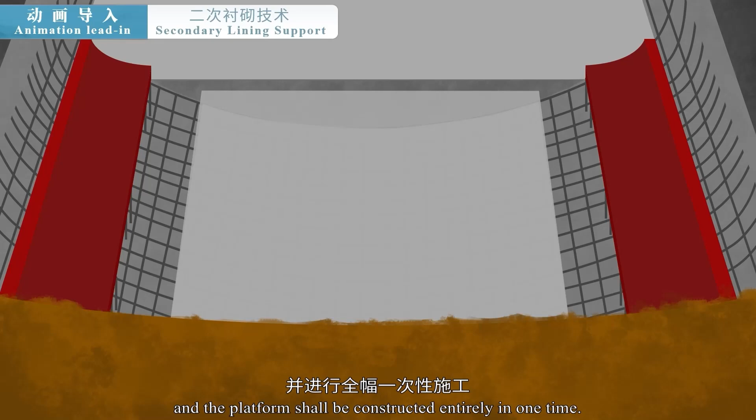The inverted arch filling shall be done by trestle platform to solve the transportation problems inside the tunnel, and the platform shall be constructed entirely in one time. After the completion of the inverted arch, the waterproof boards shall be laid manually with a multifunctional working platform.

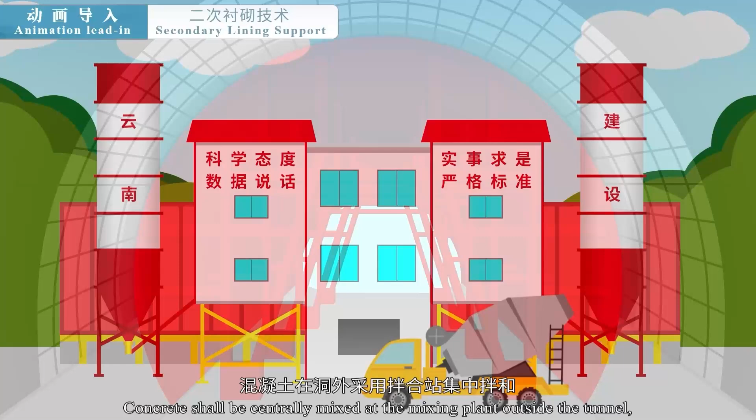After the reinforcement binding, secondary lining shall be carried out by using the hydraulic monolithic lining jumbo. The arch wall shall be poured entirely in one time. Concrete shall be centrally mixed at the mixing plant outside the tunnel, transported into the tunnel by the concrete mixer truck, and pumped into the formwork.

Through animation, we know that secondary lining is an engineering measure to ensure the stability and durability of the tunnel in its service life and to serve as a safety reserve and the last line of defense for tunnel construction. Currently, composite lining is usually adopted for tunnel support, which consists of primary support and secondary lining.

The primary support helps the surrounding rocks to achieve preliminary stability during construction. The secondary lining is to serve as a safety reserve or bear the pressure of surrounding rocks in the later stages. Now, we will explain the construction process and rules of secondary lining.

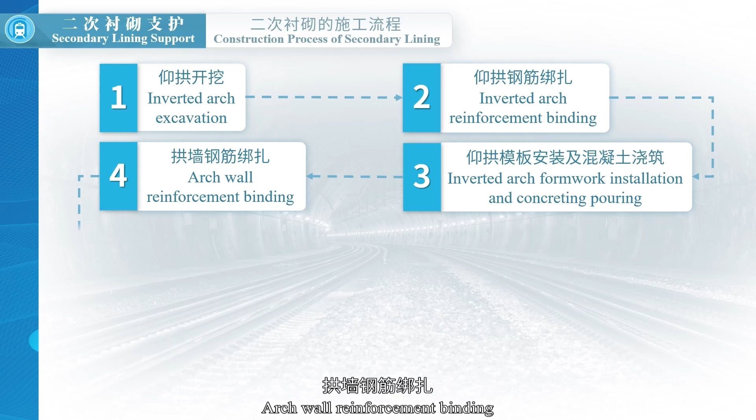Construction process of secondary lining. Inverted arch excavation, inverted arch reinforcement binding, inverted arch formwork installation and concrete pouring, arch wall reinforcement binding, arch wall formwork installation, arch wall concrete pouring, arch back grouting, formwork removal and concrete maintenance.

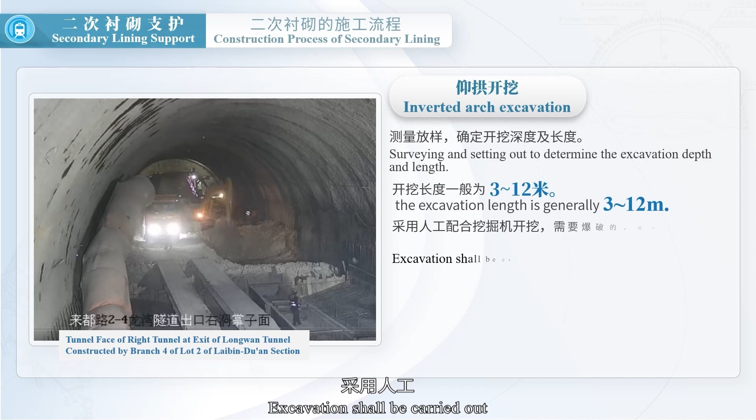Let's learn about inverted arch excavation first. Surveying and setting out to determine the excavation depth and length. In terms of surrounding rock grade, the excavation length is generally 3~12 m. Excavation shall be carried out with excavators under the help of workers.

If blasting is required, explosive charge shall be strictly controlled, and protective measures shall be taken for vent pipes and wire. After excavation, temporary inverted arch trestle shall be installed to restore road traffic. The base shall be cleared in time, and primary support shall be completed.

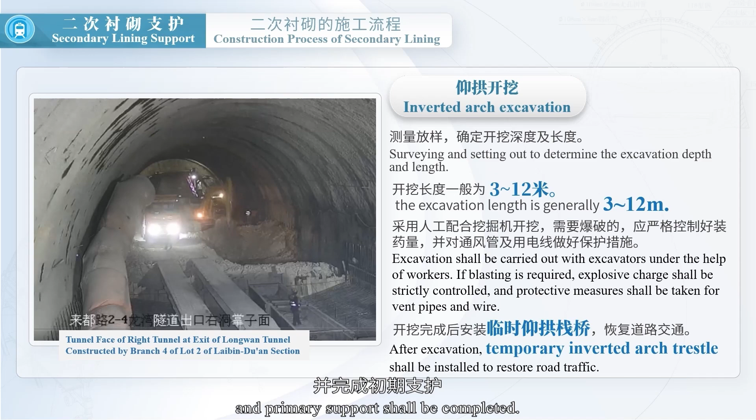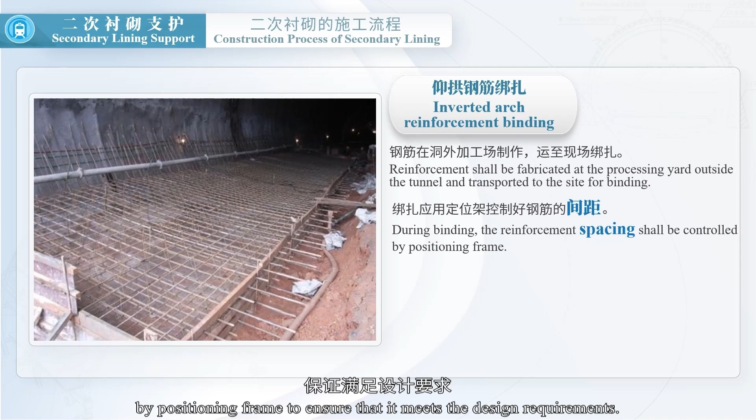Secondly, inverted arch reinforcement shall be bound. Reinforcement shall be fabricated at the processing yard outside the tunnel and transported to the site for binding. During binding, the reinforcement spacing shall be controlled by positioning frame to ensure that it meets the design requirements. The overlapping reinforcement for the arch wall shall be reserved with sufficient overlapping length, and the joints shall be staggered.

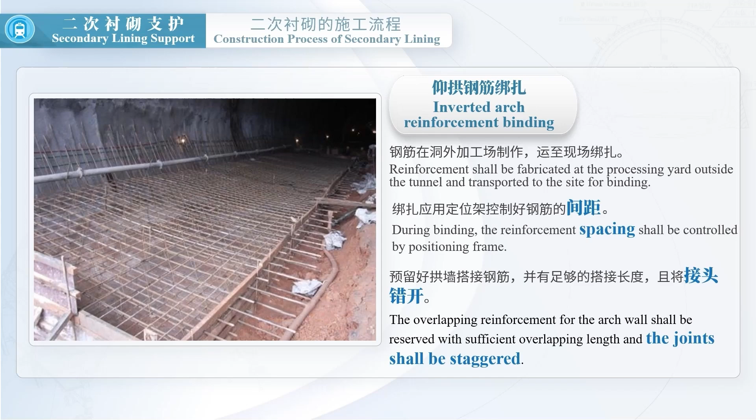After completing the above steps, the inverted arch formwork installation and concrete pouring can be carried out. Water stops shall be installed at the junction of the inverted arch end and the side wall, and sufficient overlapping length shall be reserved. Arc formwork shall be installed at the junction of side walls for the inverted arch to ensure that the pouring arc of the inverted arch meets the design requirements.

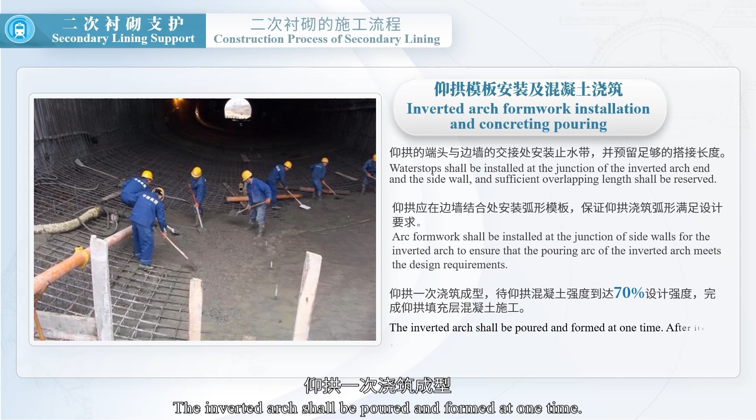The inverted arch shall be poured and formed at one time. After its concrete strength reaches 70% of the design strength, the concrete construction of the inverted arch filling layer shall be completed. Then, arch wall reinforcement binding. After tunnel convergence is basically stable, secondary lining shall be started.

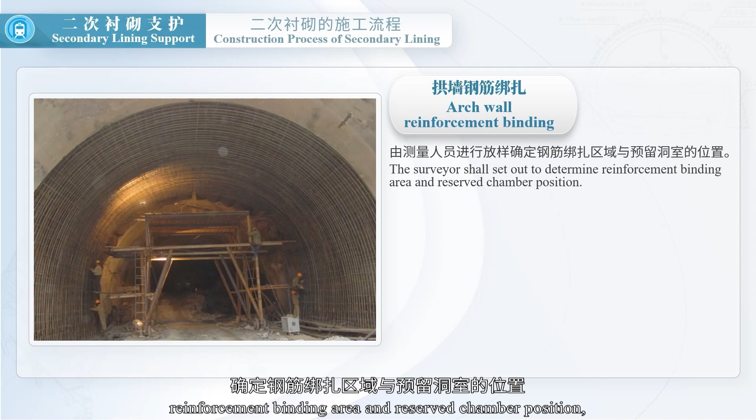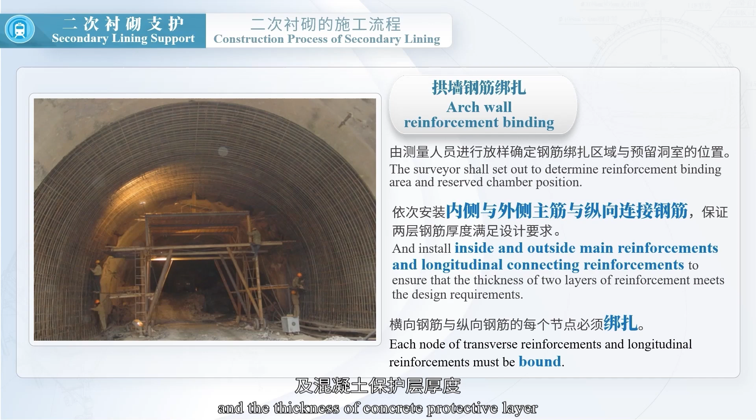The surveyor shall set out to determine reinforcement binding area and reserve chamber position, and install inside and outside main reinforcements and longitudinal connecting reinforcements to ensure that the thickness of 2 layers of reinforcement meets the design requirements. Each node of transverse reinforcements and longitudinal reinforcements must be bound, and the quality of reinforcement welds and the thickness of concrete protective layer shall meet the design specifications.

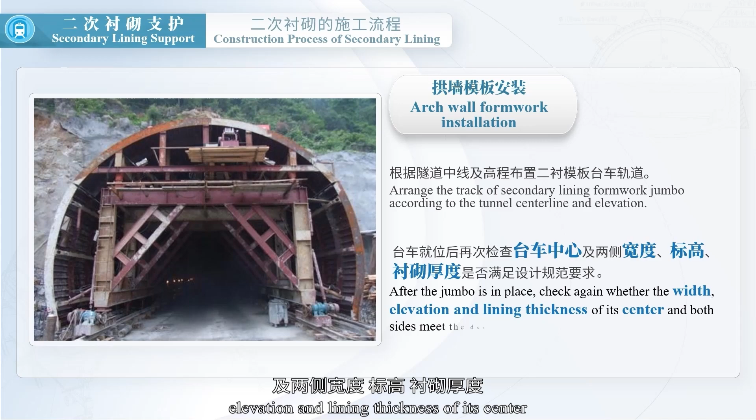After completion and acceptance of reinforcement installation, the arch wall formwork shall be installed. Arrange the track of secondary lining formwork jumbo according to the tunnel center line and elevation. After the jumbo is in place, check again whether the width, elevation and lining thickness of its center and both sides meet the design specifications.

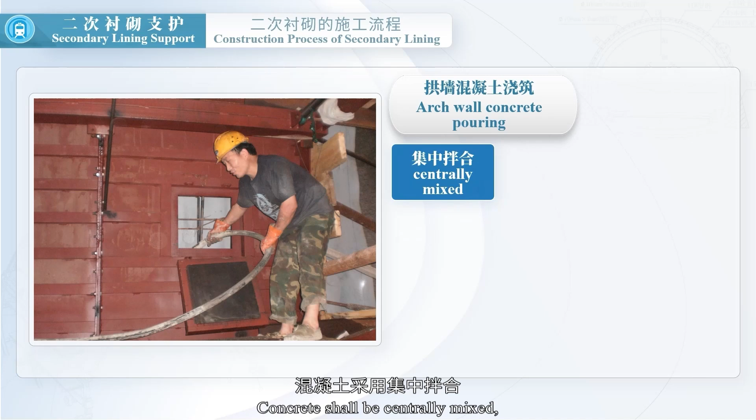After completion and acceptance of formwork installation, the arch wall concrete shall be poured. Concrete shall be centrally mixed, transported by tanker, and pumped into the formwork by delivery pump. Lining concrete pouring shall be carried out in sections. During concrete pouring, the free fall height should not exceed 2 m.

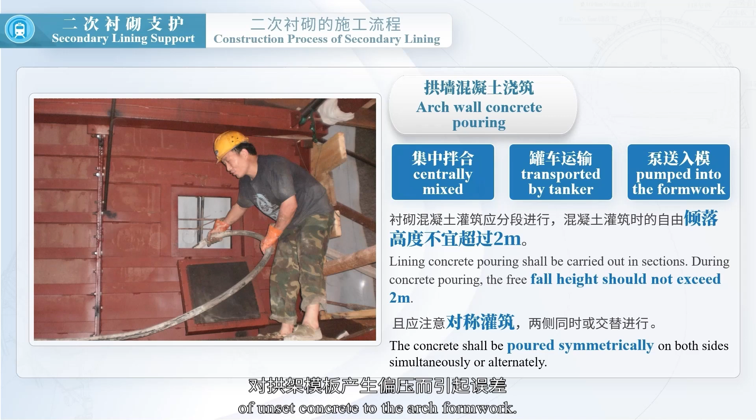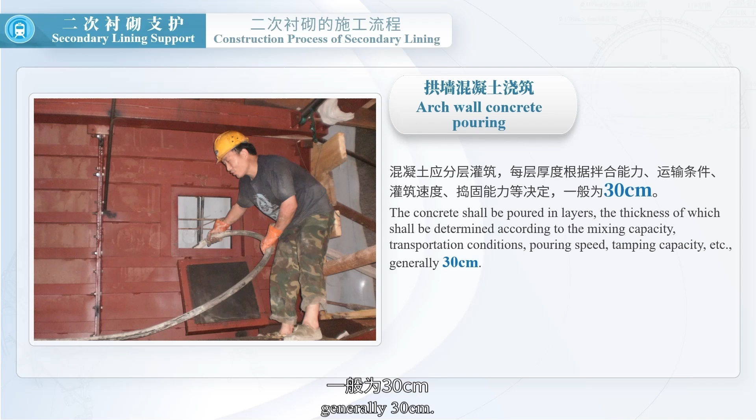The concrete shall be poured symmetrically, on both sides simultaneously or alternately, to prevent errors caused by unsymmetrical loading of unset concrete to the arch formwork. The concrete shall be poured in layers, the thickness of which shall be determined according to the mixing capacity, transportation conditions, pouring speed, tamping capacity, etc. Generally 30 centimeters. Vibration shall be tamped to make the lining have good impermeability and waterproofing performance. Especially, the construction joints shall be well treated.

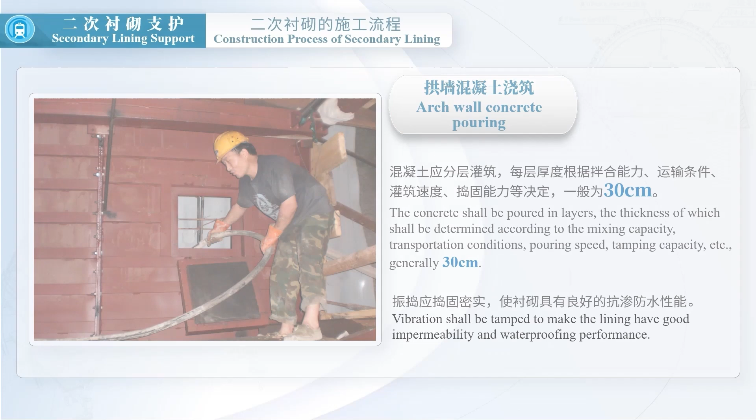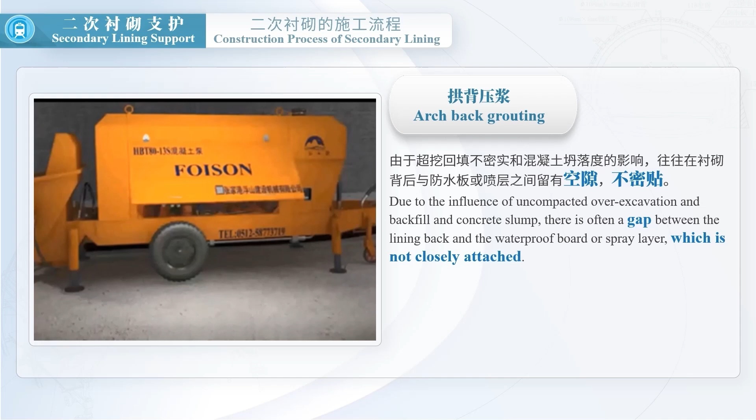Arch back grouting. For mold-built concrete construction, due to the influence of uncompacted over-excavation and backfill and concrete slump, there is often a gap between the lining back and the waterproof board or spray layer, which is not closely attached. It is evident within certain scope of the crown back. Therefore, in most cases, grouting shall be performed to make it closely attached, to improve the stress working state of the lining structure.

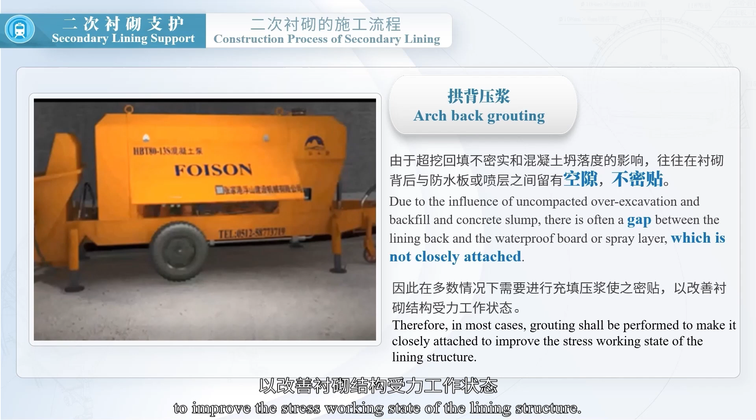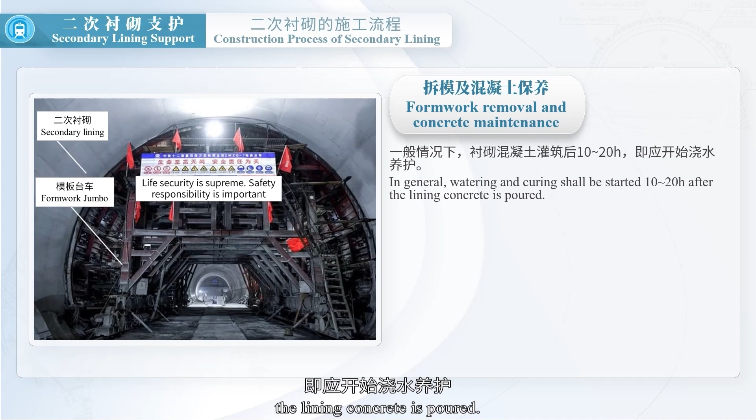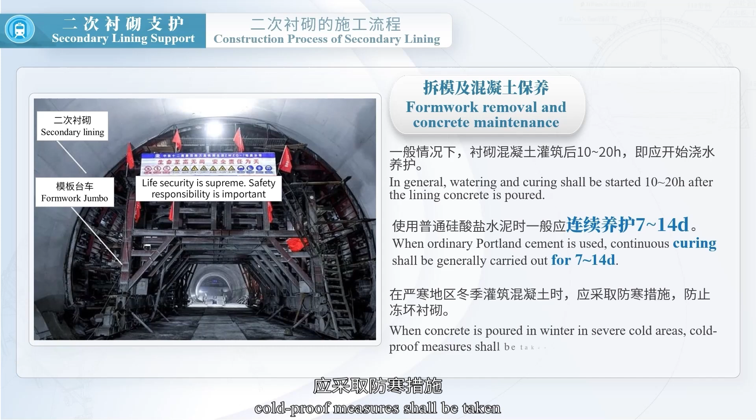Finally, formwork removal and concrete maintenance shall be carried out. The concrete can be removed from the jumbo after its strength meets the design requirements. In general, watering and curing shall be started 10 to 20 hours after the lining concrete is poured. When ordinary Portland cement is used, continuous curing shall be generally carried out for 7 to 14 days. When concrete is poured in winter in severe cold areas, cold-proof measures shall be taken to prevent freezing damage to lining.

That's all for this lesson. Let's make a summary. The secondary lining is constructed with mold-built concrete. It can serve as a safety reserve or bear the pressure of surrounding rocks in the later stages, and the last line of defense for waterproof layer.

During concrete pouring, we should pay attention to the following points. First of all, vibration shall be tamped to make the lining have good impermeability performance. Especially, the construction joints shall be well treated. Secondly, the concrete shall be poured symmetrically during integral molding to prevent the errors of lining size caused by unsymmetrical loading of unset concrete to the arch formwork.

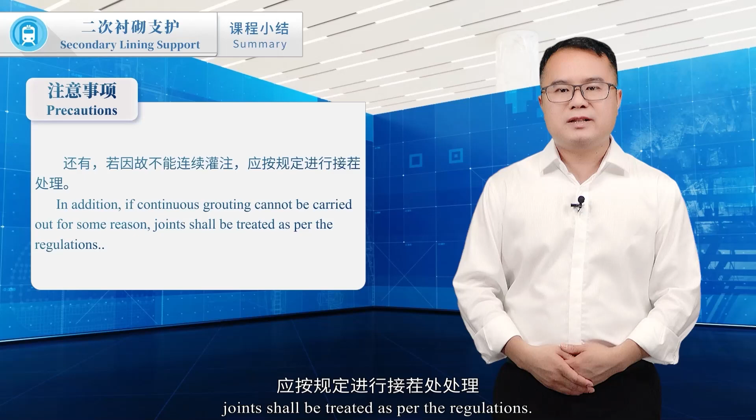In addition, if continuous grouting cannot be carried out for some reason, joints shall be treated as per the regulations. Finally, the positions of the construction joints for lining by sections shall be considered in combination with the design settlement joints and expansion joints so that they can be reasonably determined.

In the spirit of being responsible for people's lives and properties, we should be conscientious and responsible in our work, brave to explore, pursue excellence, and strictly control the construction quality of the tunnel.